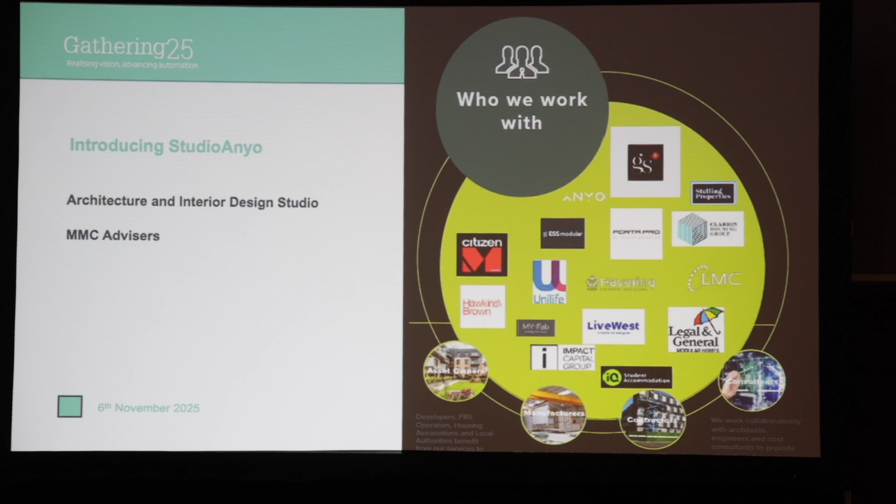They get planning permission allowing full CAT 1 volumetric all the way down to panelized, precast, LGS. We also advise manufacturers and do system design. We have our own patented system design. We work with manufacturers around the world on their system design and system development. We've just finished a project in Sindalah, the latest hotel in the Red Sea, MMC. So we've been around a while in the MMC market, and these are some of our clients.

Our current workflow as architects on an MMC project is we start with a sketch. We design all the way through to manufacturing, often with manufacturers as part of the process. So our digital workflow starts with a sketch, then goes into SketchUp or Rhino, depending on how the design develops. SketchUp, owned by Trimble, doesn't talk to anything, and Rhino doesn't talk to anything, and the versions of SketchUp and Rhino don't talk to each other. Getting one into the other is a very complex process; you need a master's degree to get between the two.

We then go into Revit, which as a program is probably 20 years behind where the car industry sits in terms of program development. It's a very clunky old program, so we do it in full BIM 360. We put it out into an IFC that the other consultants don't use, or they have different versions. The other consultants refuse to go into BIM 360, so some of us are in an IFC file.

Then we get to planning, and we have to produce 2D drawings. But the Revit visualizations don't work for planning, so we need to redo the drawings from Revit into a planning set, because Revit doesn't do graphics. We have to redraw the files from Revit for planning. Then we have to visualize it, so we go back into Rhino, but Rhino doesn't like Revit and IFC. So we have to move all these Revit files around trying to get visualizations out.

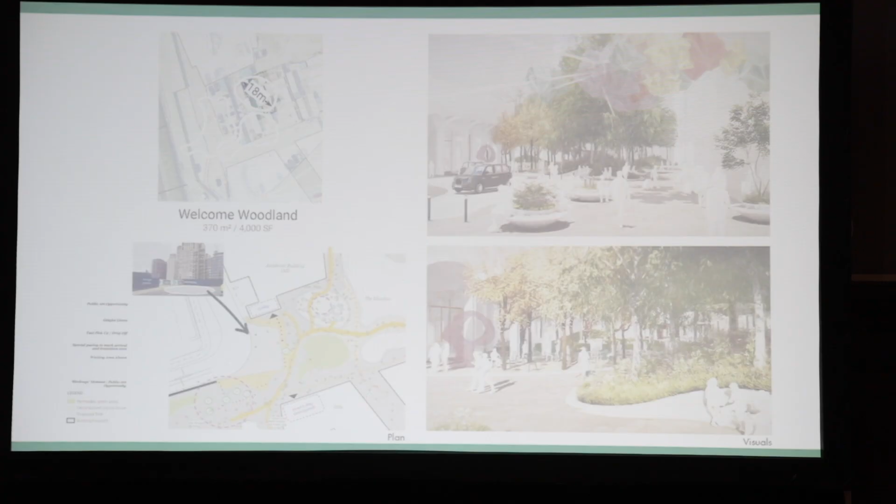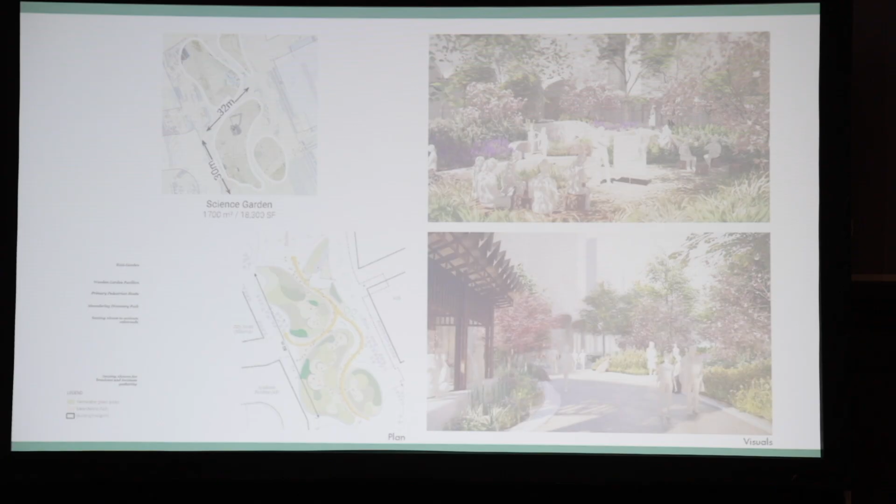So even the latest version of Revit can't manage curves. So all these curves and 3D visualizations that you see here, trying to get these into a Revit model, which is a very cumbersome 2D modeling software, is extremely difficult. And even the latest solid versions of Revit find it very difficult. And to move that back into planning drawings then it's extremely complicated.

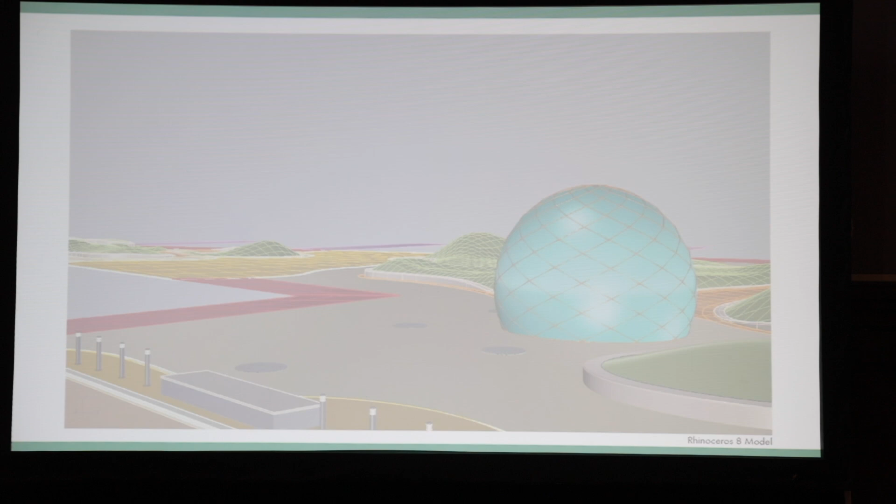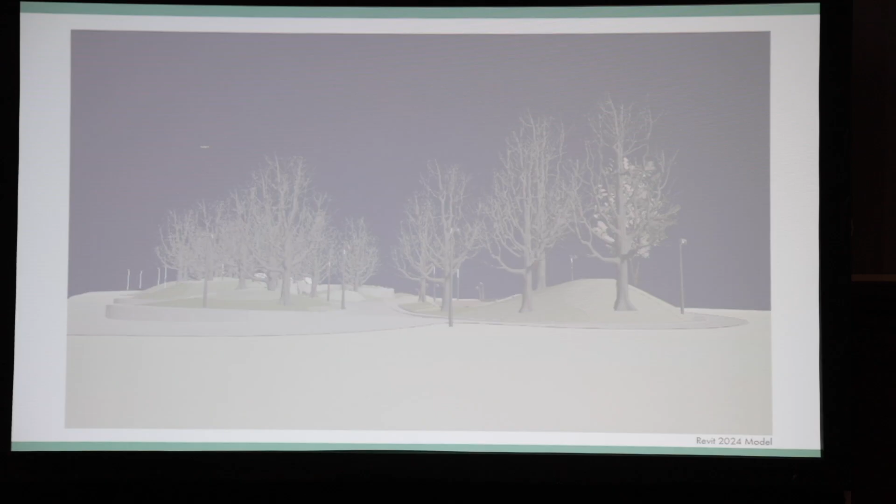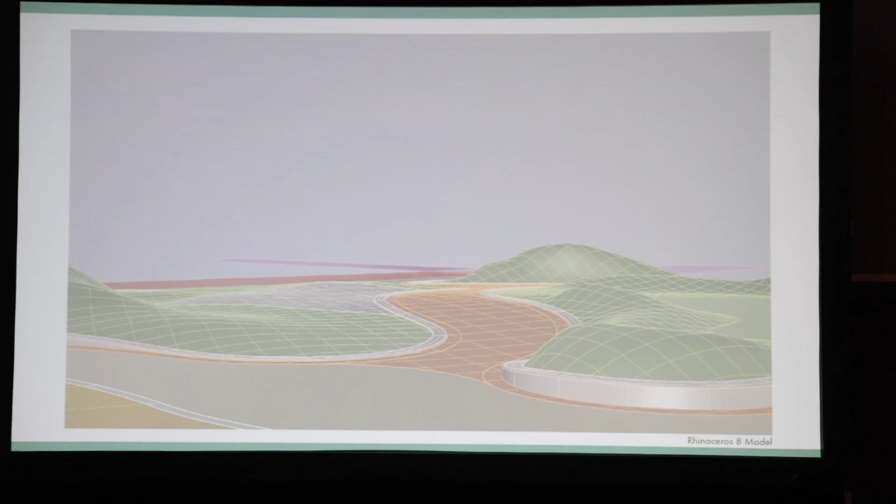So we're moving from Rhino straight into a Revit model for planning, but back out into a SketchUp software to visualize. So it has to move through 3 sections very quickly, and that's extremely complicated, particularly when you're using 3D forms like this and the edges of slab. Back into a verification model, full BIM standards for Imperial College. So this is all fully BIM coordinated back into a full model.

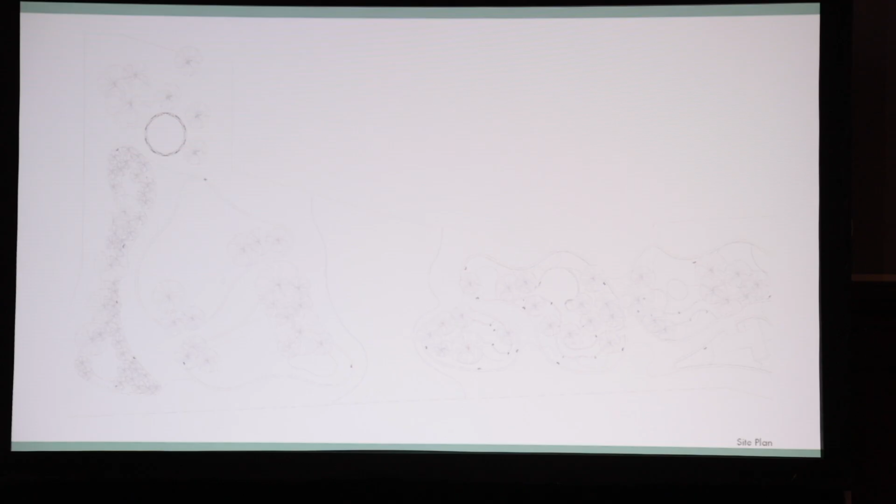Then the architects need to take these drawings back into planning drawings, but they've basically had to do 2D modeling on top of them. So again, it's a very difficult workflow. So it's very hard to realize the actual true nature of how you're actually doing it at the coal face.

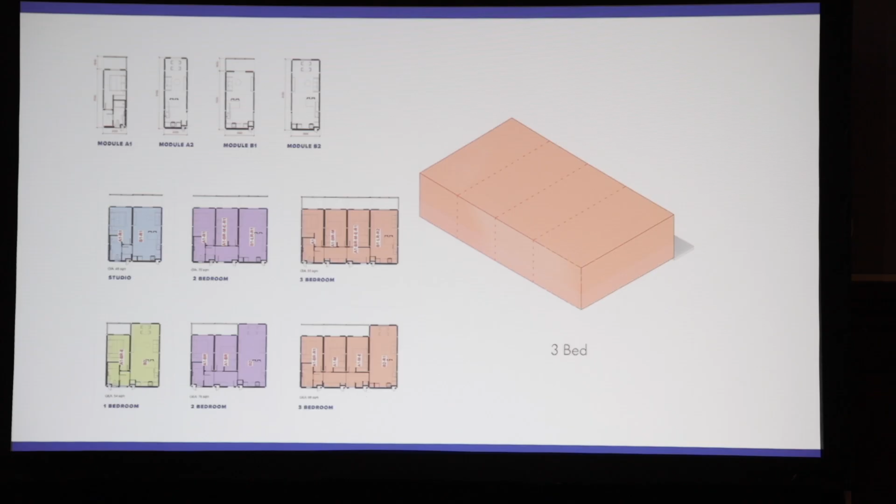So this is a pattern book we've just created for Rapid Builder Ukraine. So this takes a volumetric apartment system. It codes it back into a full BIM model. So there's a BIM model tied behind this. And the idea is you publish the full pattern book to architects and to manufacturers, so it allows rapid deployment of accommodation throughout Ukraine through a standardized layout.

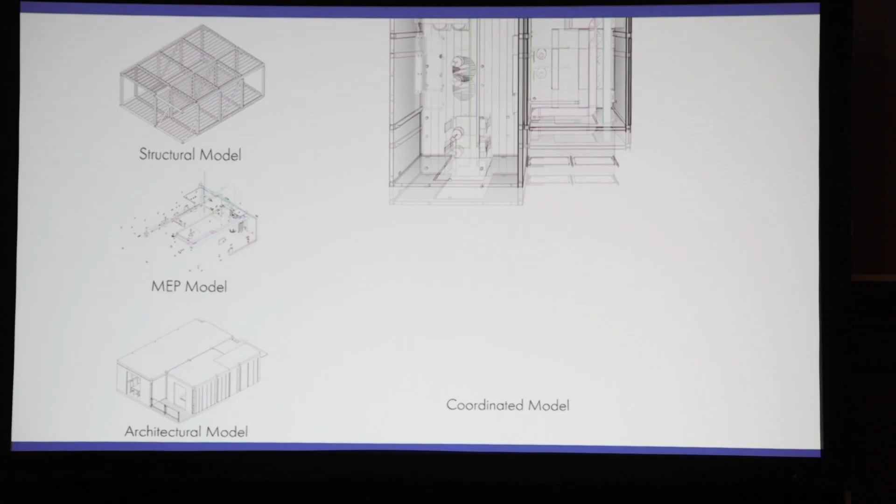It's fully compliant with all the codes in Ukraine, and it's fully designed to the ground conditions and all the regulatory requirements in Ukraine. So it'll be a fully signed off system that you can just build, and you'll be given the full tech Revit model to work with.

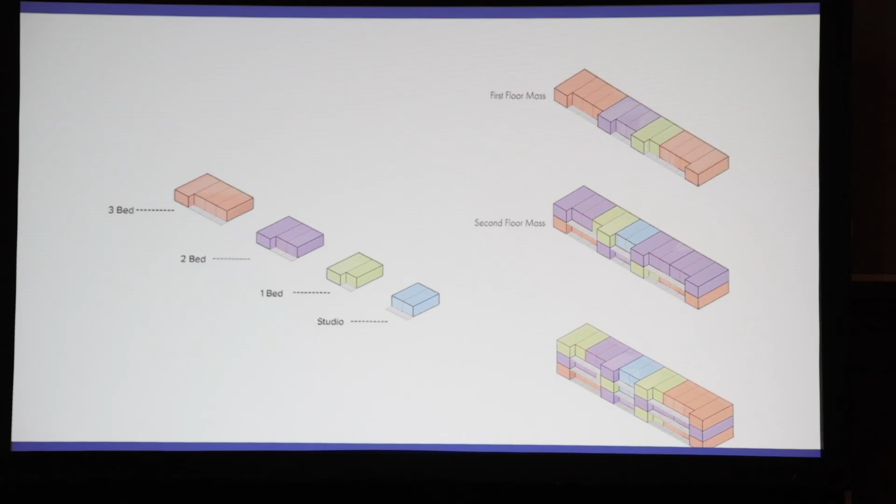So basically, this system allows for multiple stacking. So stacking 1 bed on top of 2 bed. It's got click and connect technology in it. So when it comes down, it clicks together and connects, and it can create many different plan forms and variations to allow multiple mixes of apartments to be deployed in a volumetric fashion.

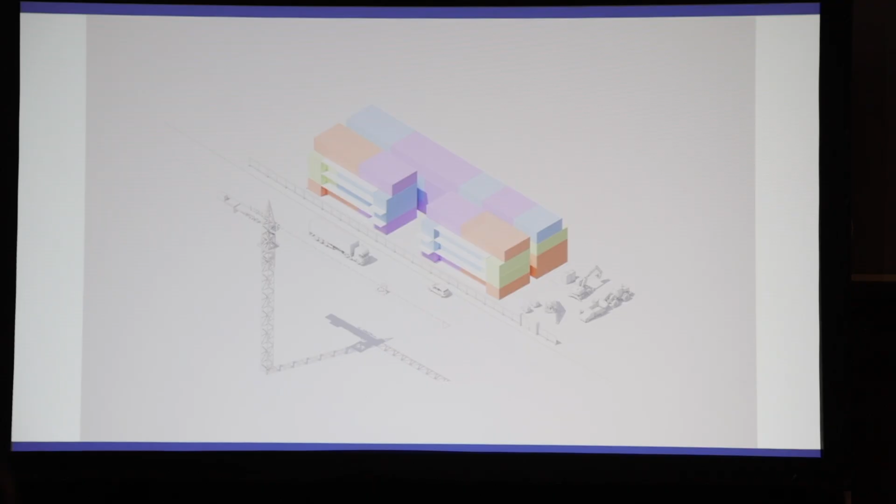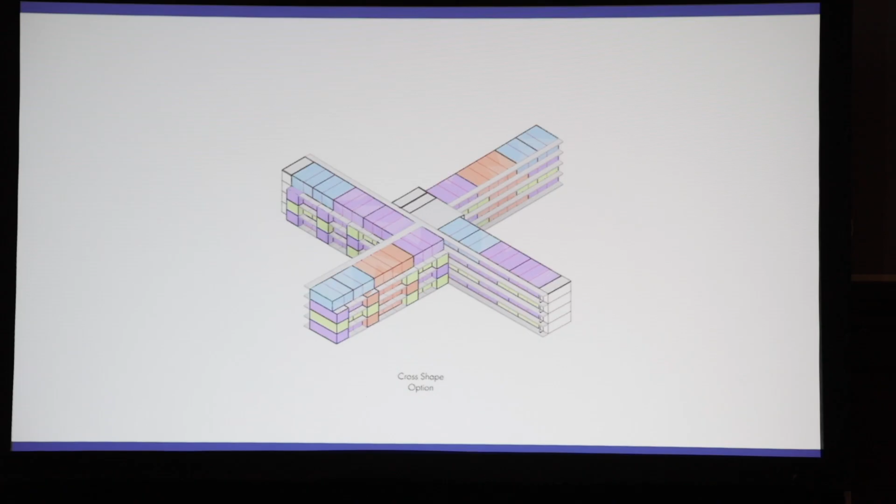So you see you can get a templated apartment block fully ready, and you give that to manufacturing partners with a fully detailed construction, and you've got multiple stack options, multiple variations of 1, 2, 3 beds to the 1 bed stack on top of it, 3 beds, etc. This and full service integration. So the idea is you can rapidly rebuild Ukraine with these apartment typologies, and the technology is manufactured locally.

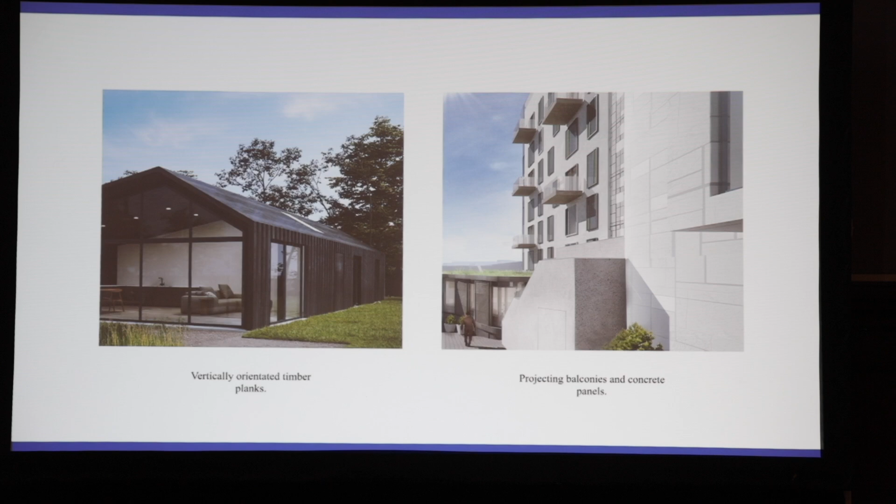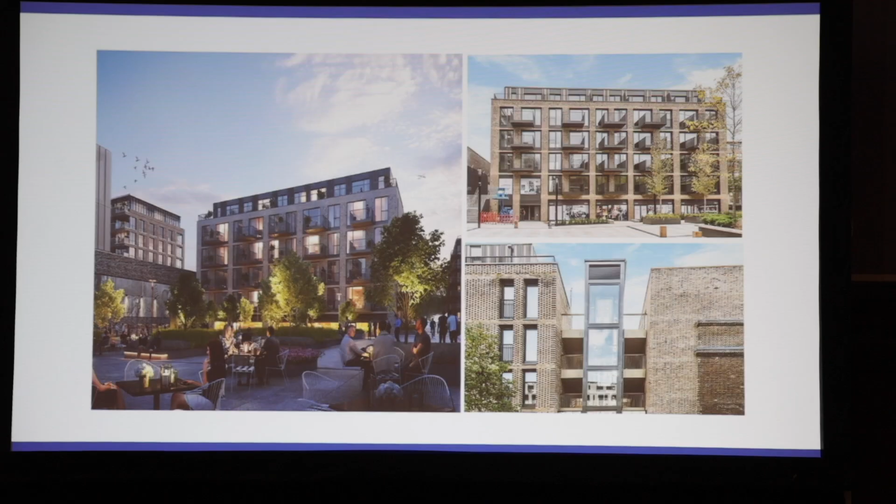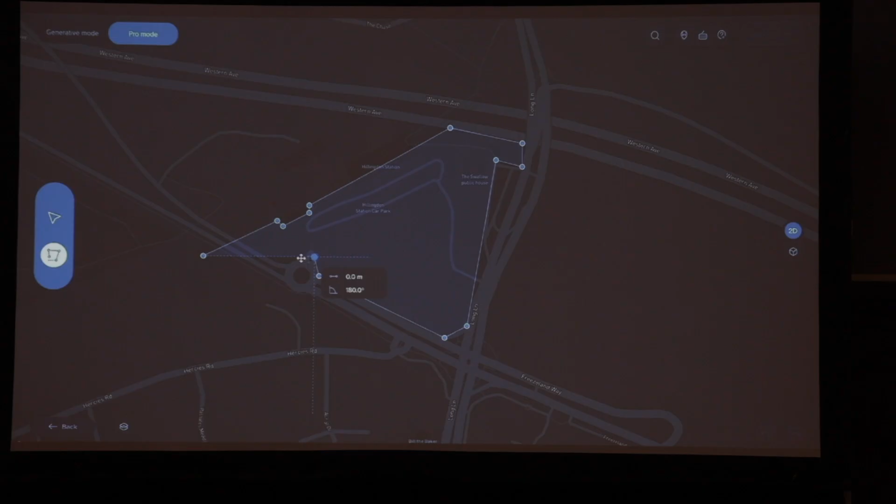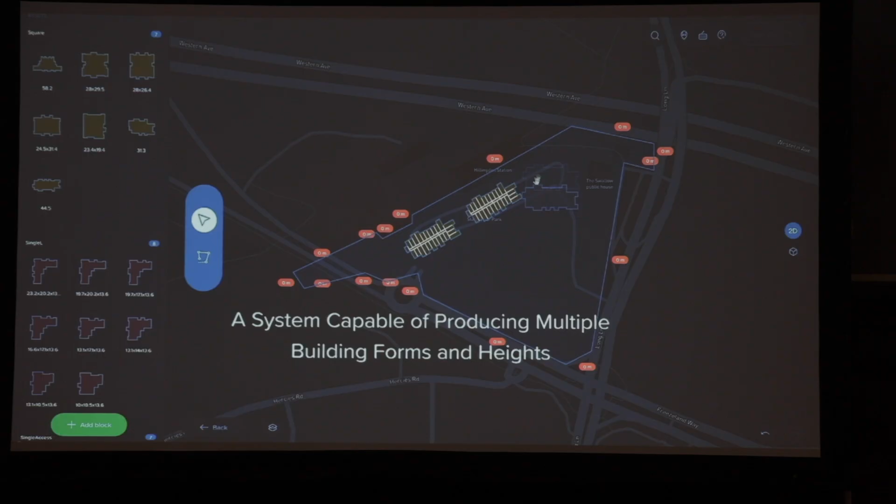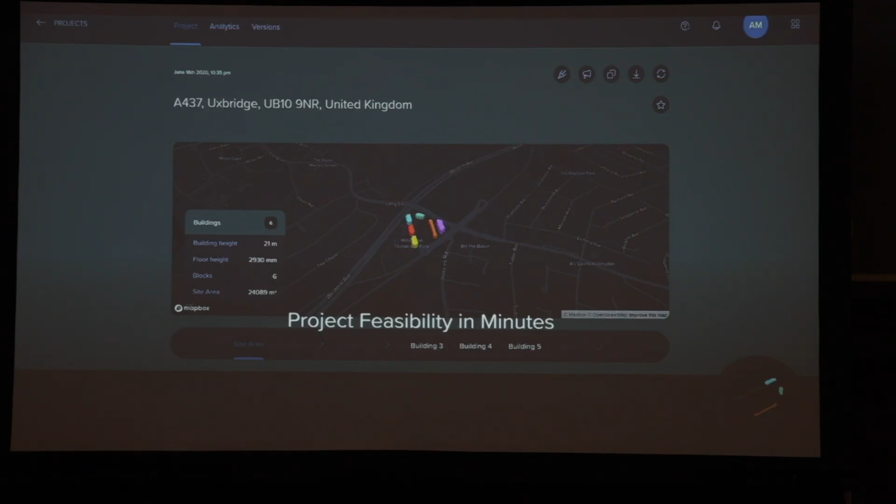So from the pattern books, which allow rapid deployment of standardized apartments, this one is working with an AI software. And this takes the pattern book into an AI optimization software and allows the software to create optimized solutions using the pattern books. And this is also attempting to allow the architects some degree of design. So the problem with a lot of the AI softwares at the moment is they're trying to control the design aspects, which doesn't allow the contextual design of the units.

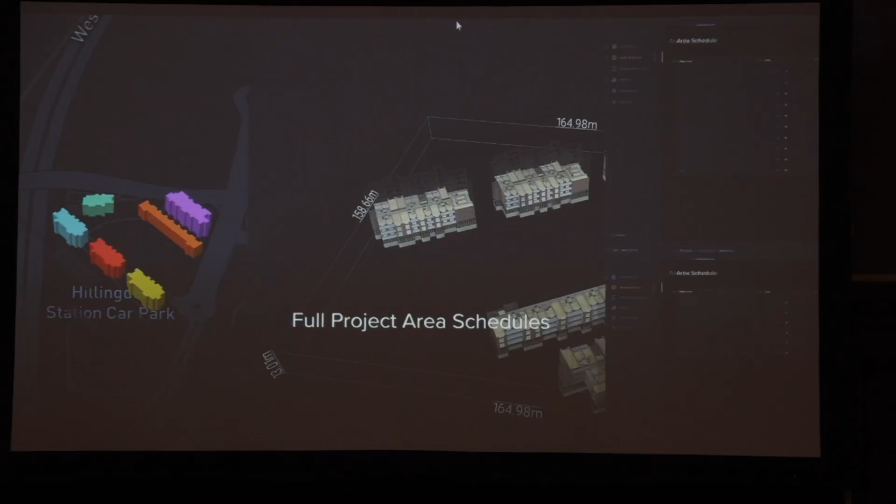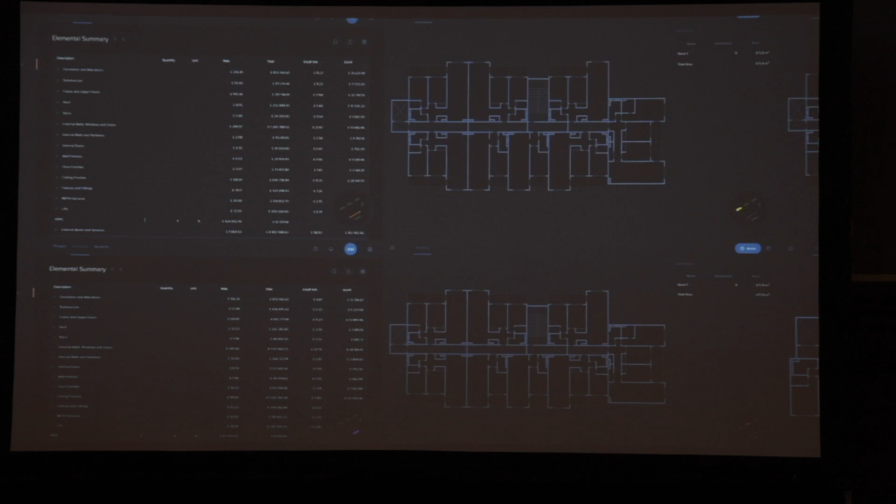So what we've been trying to focus on is allowing design variation and non-standard adoption for sites. But tied to this pattern book is a fully costed model, so we have manufacturing level costings and data tied to the unit. So as you're doing your massing and as you're doing your design, you can control costs, program, change the finishes, and manage those aspects through the model. And it creates a significant number of variations, so you can test it.

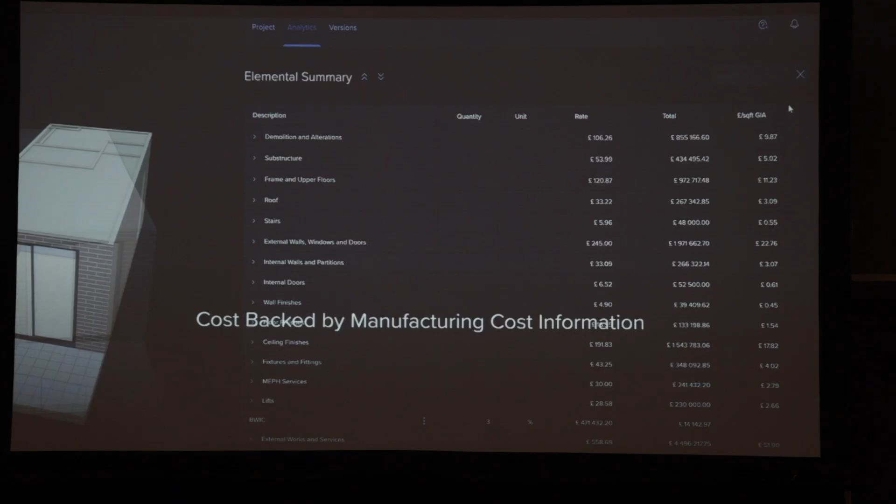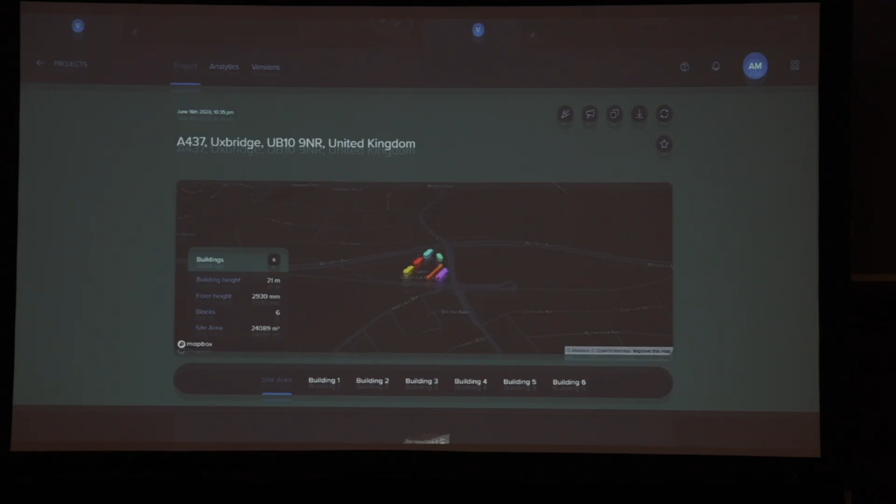It also links to thermal software, and then some of the ones in the UK now are linking to VU.CITY, or linking to the planning. This one can also slot into the planning models. So in the UK they have built citywide models that the planners use. And you can drop these models into them, so in your planning meetings, these models can drop in and relate to the bigger planning stories.

But kind of the key takeaway is these softwares and these integrations are still very much in the early adoption stages, and there's a significant amount of work to be done before they can be integrated into architectural workflows, and consultants actually all working together in the BIM models, and not everybody having to redraw it at each stage. So hopefully AI will bring that on and start pushing on BIM integration so that the workflows can be continuous.